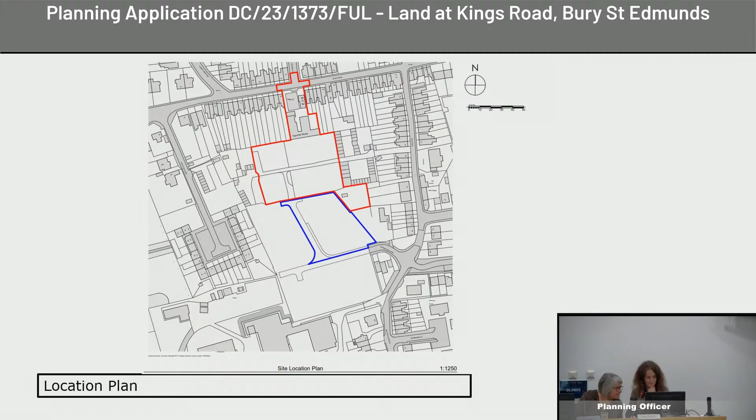The site is part of a wider allocated site in the Bury Vision BV10B in the current local plan. However, it should be noted that the site is no longer allocated in the emerging local plan and is expected to come forward as a Windfall site.

The southern part of the allocated site is now a designated local wildlife site. Further to the south, we've also got former chalk mines, which I will expand on in a little bit.

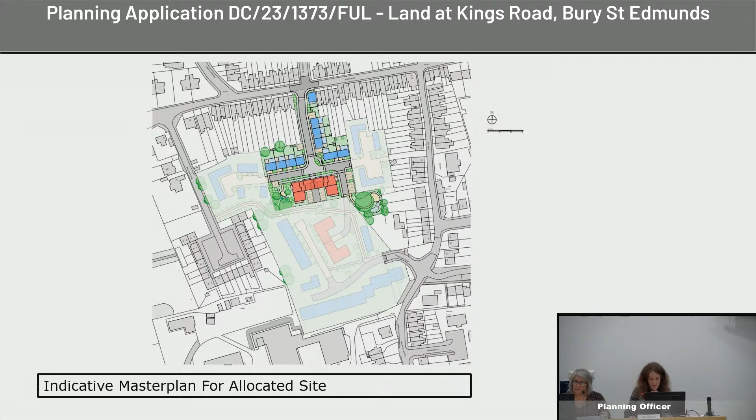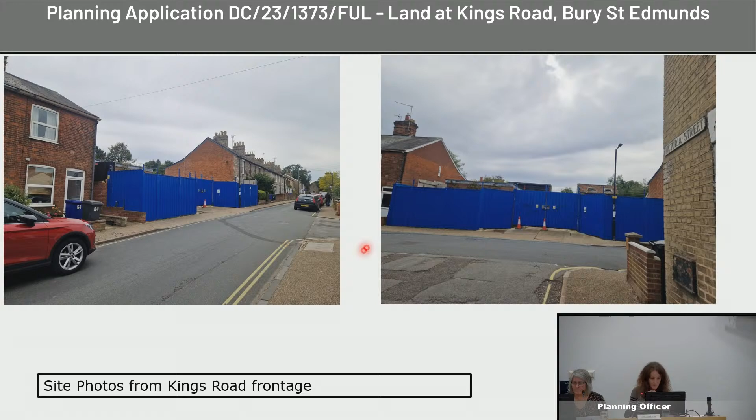And here we've got a view from the other direction, showing how the scale of the terraces slowly increases towards the east, and a view of the application site with the derelict buildings proposed to be demolished. This part is part of the conservation area; the undeveloped bit to the rear is outside of it.

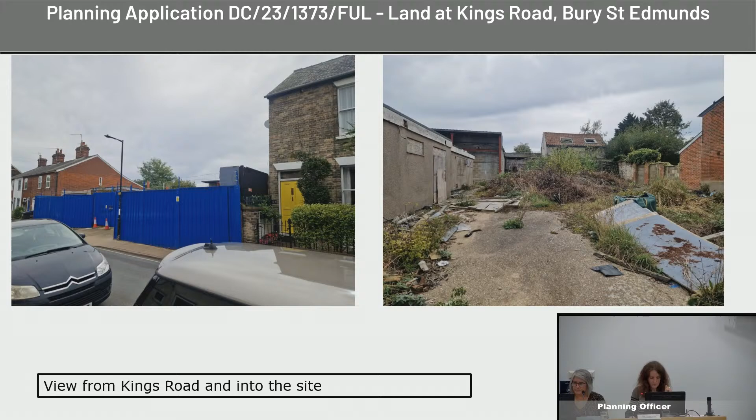To the front of the site and along King's Road, we've got either single yellow or double yellow lines, with residents parking further west and on Victoria Street.

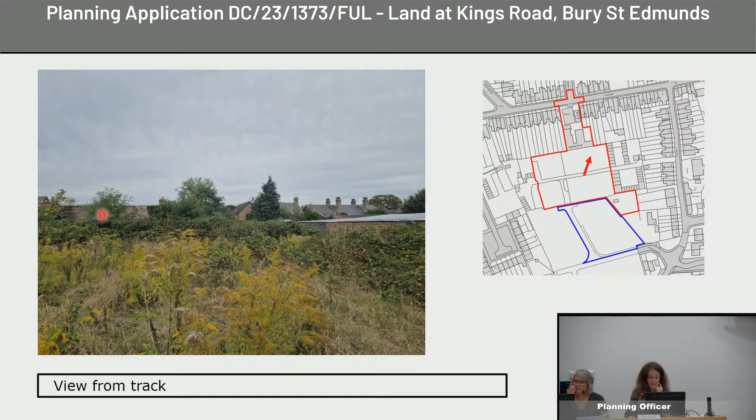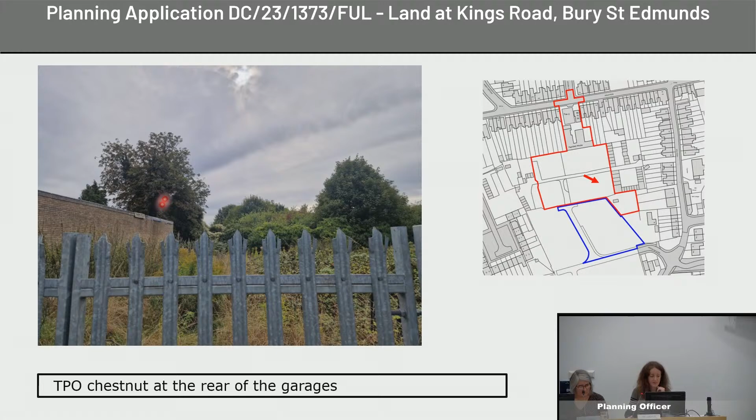Here we've got a view from the access track, which dissects the application site, looking back towards the terraces on King's Road, with the buildings on the application site to the side. That's a view in the other direction with the garage buildings along the side and the most significant TPO tree, the horse chestnut.

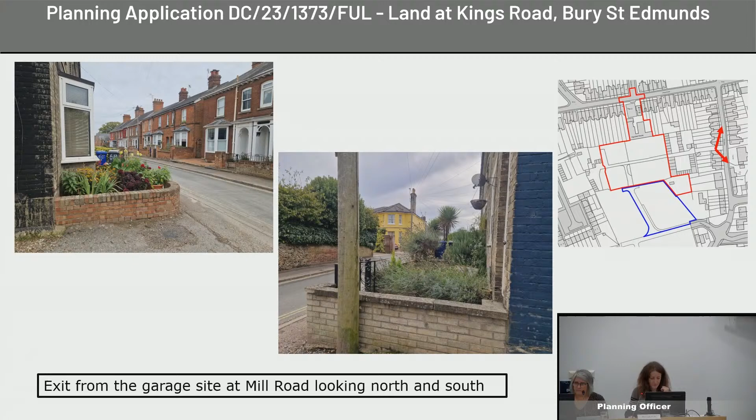I've also included some pictures from the access on Mill Road, which is off the application site. However, the right-of-way gains access from Mill Road and then crosses the application site. This is the access looking back towards Mill Road, and this is the eastern garage side. This is the view up and down from the Mill Road access to show the sort of visibility you would have entering or leaving the site.

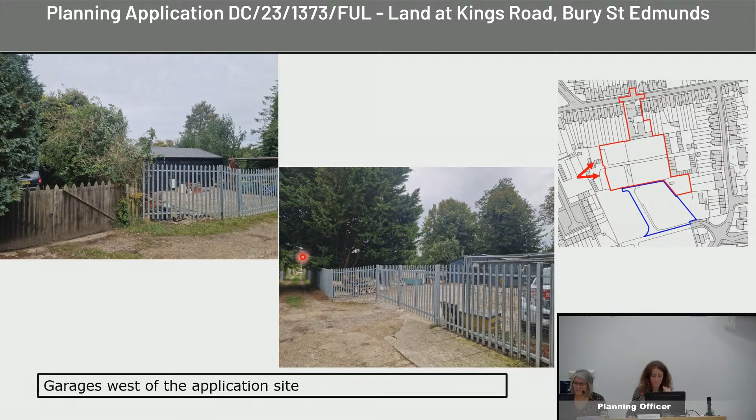And these are the garages on the western side looking back towards the application site. The entire track is fenced off with palisade fencing left and right to restrict access onto the adjacent land.

The application proposes 10 dwelling houses - 9 3-bed and 1 4-bed - and 16 apartments, of which 6 would be 1-bed and 10 would be 2-bed.

There are 2 areas of informal public open space, and initially there was a small pocket park proposed on the western public open space. However, this would not meet current standards and was therefore requested by the Parks team to be omitted in lieu of a financial contribution to play equipment off-site.

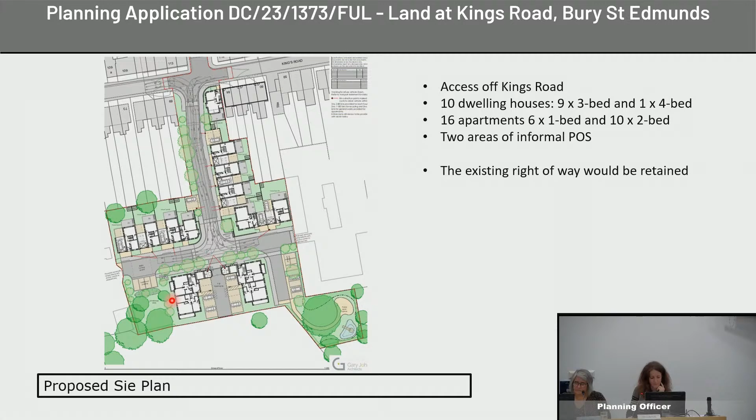The application proposes a detached dwelling at the front of the access of the new access road, which is similar in scale to the adjacent terraces and curves into the site.

There would be a reasonable rear garden that respects the size of the rear gardens of the adjacent terrace properties, with new proposed terrace buildings along the access road.

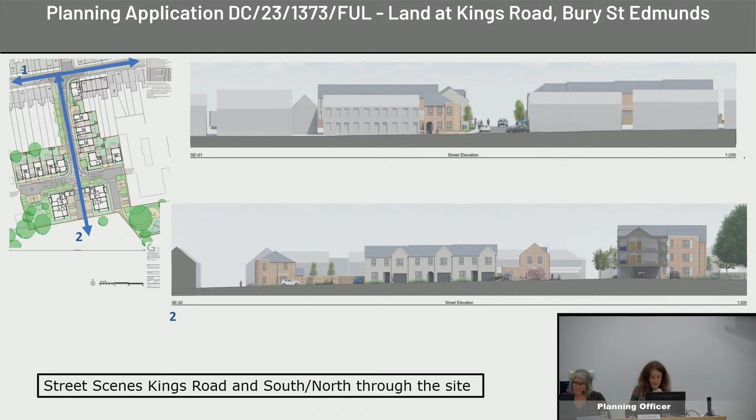By the T-junction, the dwellings would curve either side, and again you would have a second row of terraces, and opposite, furthest set into the site, you would have an apartment building which is 3 stories. All dwellings proposed at the front of King's Road and along the new access road are 2-story.

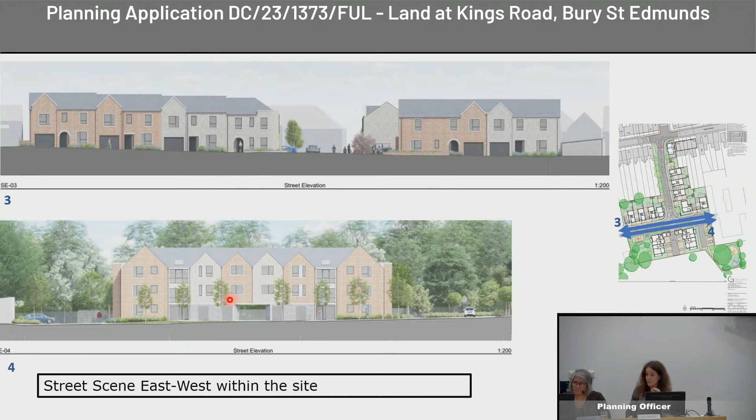And here we've got a final street view from the rear of the proposed apartment building with balconies for each of the flats, looking out onto the southern part of the application site.

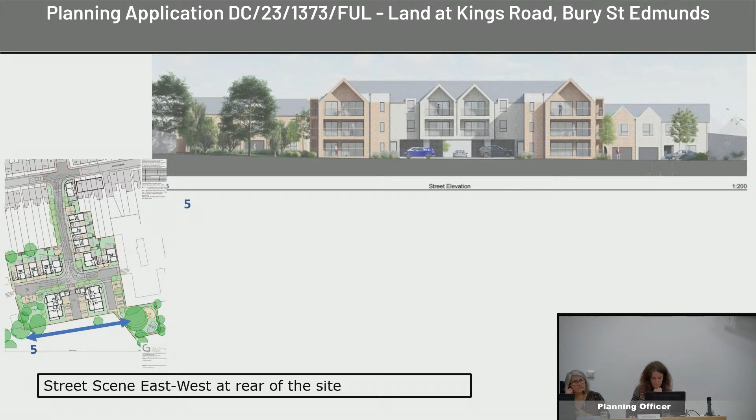All apartments, here we've got the floor plans, the western block. The eastern block would be mirrored and identical. At the top of the access road, we would have an undercroft that takes you through the apartment block to access the parking in a courtyard arrangement. Each flat meets the national space standards and would benefit from balconies.

Cycle storage and bin storage will be at the front of the building for easy access by the bin collection crew, as well as people using the cycle storage facilities.

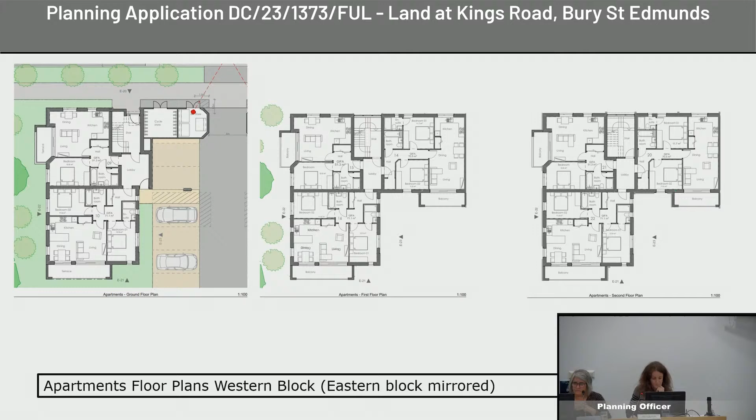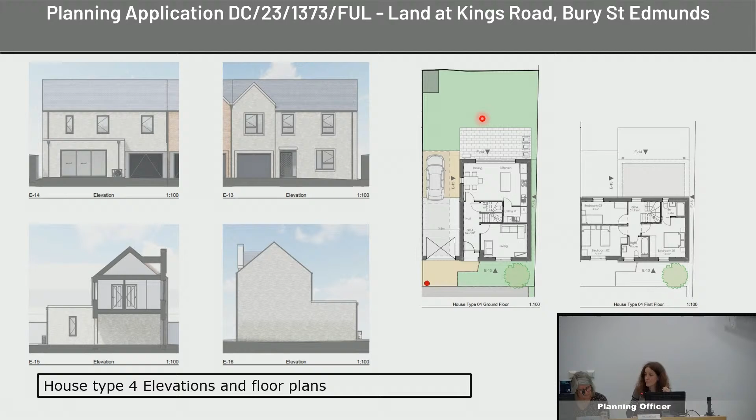And finally, house type 4. Like I've said, they all meet the national space standards and provide access to the rear gardens for cycle storage, which meets the current standards.

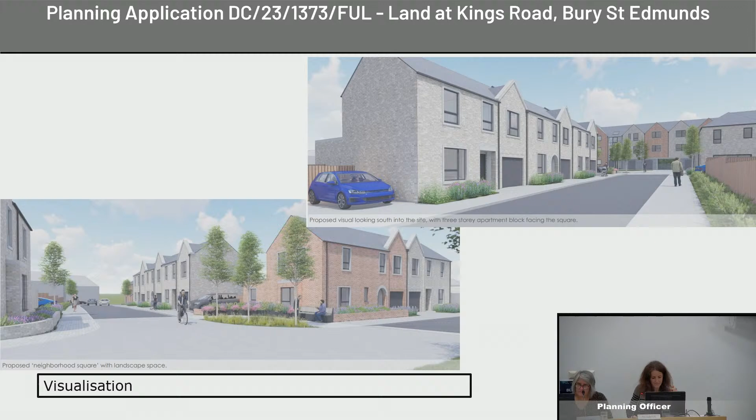Within the application site, we would have a neighbourhood square at the T-junction, and, like I've said, 2 informal public open spaces to either side of the apartment block.

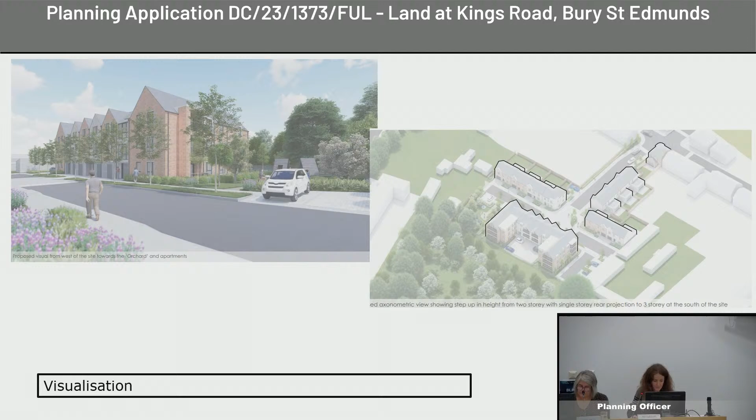Moving on to access, parking, and highways matters. The access road is proposed to be a private access off King's Road with a single footpath on the right-hand side. The carriageway would be 5 metres wide and the footpath 2 metres.

The application proposes off-site highways improvement, including a speed table at the front of the site, tying into the junction with Victoria Street to slow down any traffic in that area.

Every dwelling house would be provided with 2 parking spaces, and the apartments would each be provided with 1 parking space, with 7 additional visitor parking spaces. That is slightly below the Suffolk parking guidance, which would require 2 parking spaces per 2-bed and 3-bed unit and 3 parking spaces per 4-bed unit.

However, due to the sustainable location, the good access to public transport services and facilities in the town centre, and good cycle provision, the Highways Authority have accepted the reduced parking in this location.

Lighting details are still to be determined at the discharge of conditions stage, and would be covered by the lighting condition included in the recommendations.

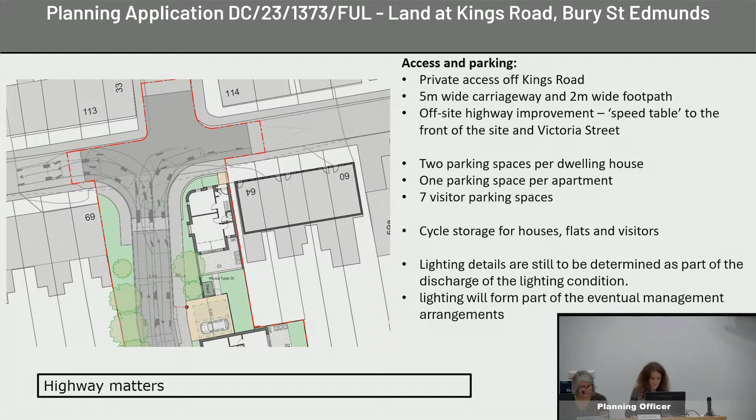The parking bays for the houses meet current standards. They are 3.5 metres wide with a 0.9 metre clearance for convenient bicycle and bin access.

Bin and bike storage for the apartments, like I said, would be to the front, and details for the bike storage within the storage room would be secured by condition as set out in the late paper. The private right of access across the site would be retained.

It is proposed that bollards are installed on the western and eastern part of the site to restrict access to the sites to those with the right of access.

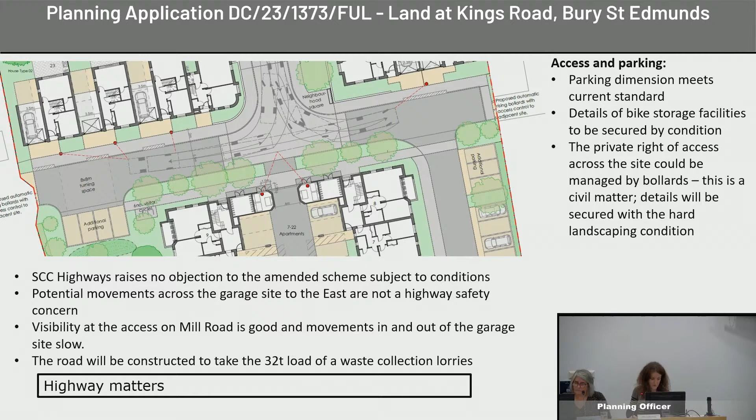However, this is a civil matter, and the Highway Authority did not consider anyone potentially passing the garage site on foot would result in a highway safety issue, and therefore highways would not want to control the use of bollards in this location.

Moving on to drainage, surface water and foul drainage. Soakaways and discharge to water courses are not feasible on this site. Therefore, in the drainage hierarchy, the only option is to connect to the public sewer system. Anglian Water have been consulted and have accepted the connection to the sewer system.

The drainage strategy has been designed to accommodate flows and volumes for the 100-year flood event with no overspill to surrounding areas and allowance for climate change. To allow for all storm cases, stormwater storage is provided in the access road here, highlighted in blue, and that would help to reduce the flows to 2 litres per second.

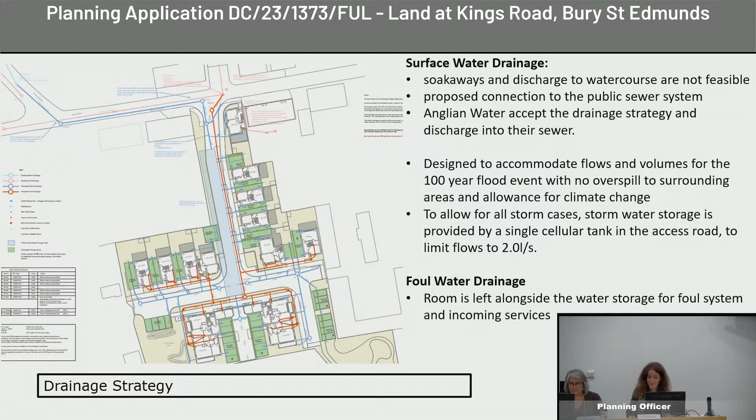The drainage strategy, like I said, was accepted by Anglian Water and the local flood authority, Suffolk County Council. In terms of foul water drainage, there is room left on the western side of the access road to connect to the existing foul drainage connections on King's Road. And Anglian Water have confirmed that the local foul sewage system has got capacity to serve that development.

Now, moving on to the matter of land stability. To the south of the application site and within the wider allocated site, we've got former chalk mines. The chalk workings caused a collapse of dwellings on the ground in the 1960s, and after that the whole area was fenced off. Jacqueline Close development had to be demolished, and ever since the applicant's consultant for land stability has been involved in the investigation of the below ground land stability matters on this site.

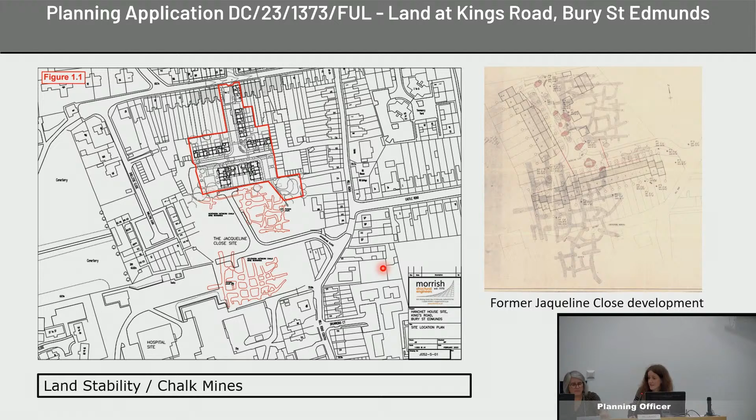For this application, a structural development brief has been prepared by that consultant in support of this application, and the land stability information was then assessed by an independent specialist consultancy, EPS, on behalf of West Suffolk Council. EPS have raised no objection to the mitigation strategy subject to conditions.

There's predominantly chalk across the application site, and therefore normal continuous concrete trench foundations will be adopted for the construction. In the southwest corner of the application site, where we've got a group of TPO trees, there is a very local intrusion from the Jacqueline Close workings, and then there's another very local intrusion at the second public open space underneath the chestnut TPO tree. To deal with these, it is intended to fill both these small localized areas of workings from ground level in a controlled staged process.

The existing workings will first be plugged at the boundary location using a dry mix to form a barrier, which will be administered from the Hanchets site from present ground level and by using open drilling to avoid any potential damage to the existing trees.

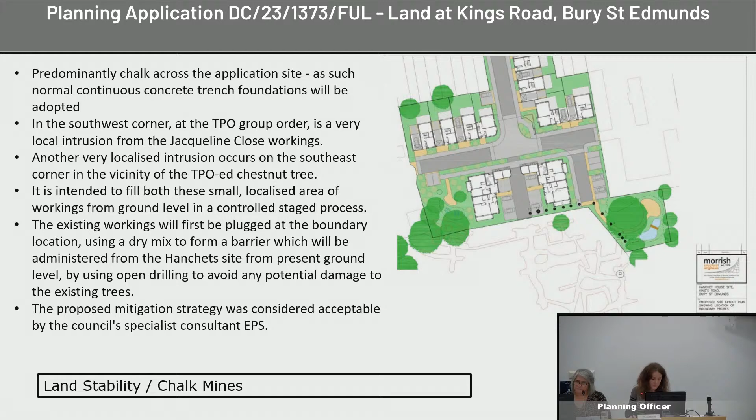In response to the original application, we have received representations from 10 properties and objections from 7 neighbours, raising concerns mostly about highways matters and parking provision as set out in the committee report. The ward councillors echoed those concerns and asked that the application be considered at committee.

The Bury Town Council submitted a holding objection to the original submission and suggested further investigation of the chalk mines, raised highways concerns and concerns about waste collection and energy and water efficiency.

Subsequently, amended plans and further information, including a highways technical note and additional ecology information, have been submitted, and a full reconsultation was undertaken. In response to the reconsultation, we have received 1 representation and 2 objections.

The Bury Town Council has maintained their objection on highways grounds and raised additional comments about sewage and refuse collection and the unambitious design.

In terms of consultation responses, we have no objections from any of the consultees, subject to the conditions attached to the recommendation in the officer report.

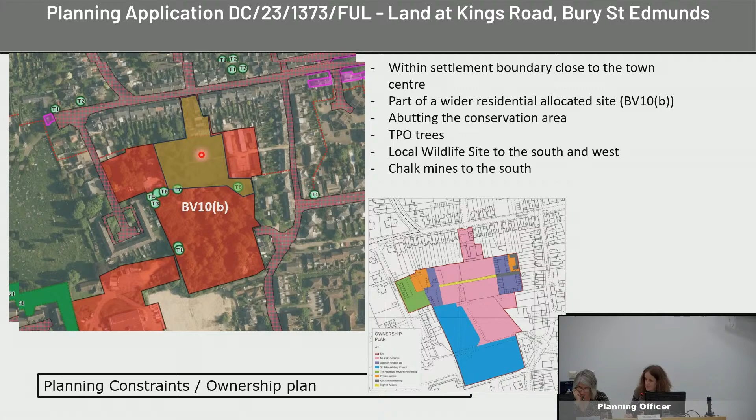You raised the question about the funding of the maintenance and what happens if something fails. I think that is like with every development. It is something buyers are aware of, and everyone would, like you do when you buy a property, have a solicitor check these things. It is very common in locations like this to have small developments that are not adopted and have private management companies. We will secure a management plan for the soft landscaping and public open space, and any maintenance will have to be undertaken in accordance with that schedule. So it does not really matter which management company does it. The planning control is to enforce the maintenance in accordance with the maintenance plan.

Yes, please. So, Chair, just a couple more questions. I think Councillor Waldron asked about the stability of the land and what happens if in 20, 30 years' time buildings collapse.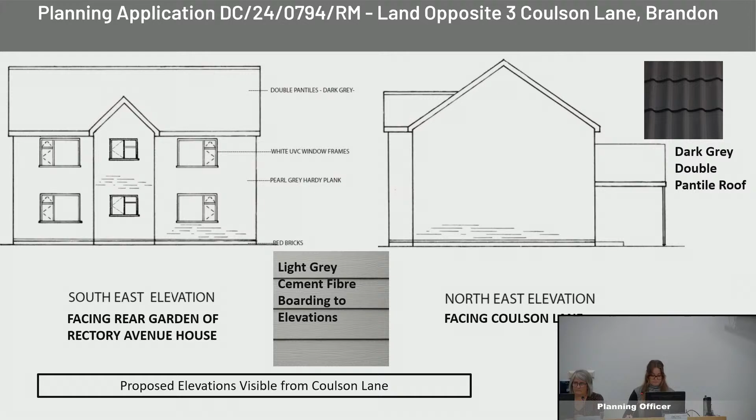Moving on now, this is the front elevation, you can see the carport underneath and the balcony above. This would be seen from the public right-of-way and the orchard to the north and the wide open countryside. And here's the southwest elevation, which faces the bingo hall site, which I'll come on to in a moment. Just for clarity, these material snippets show the actual colours, they're not black and white.

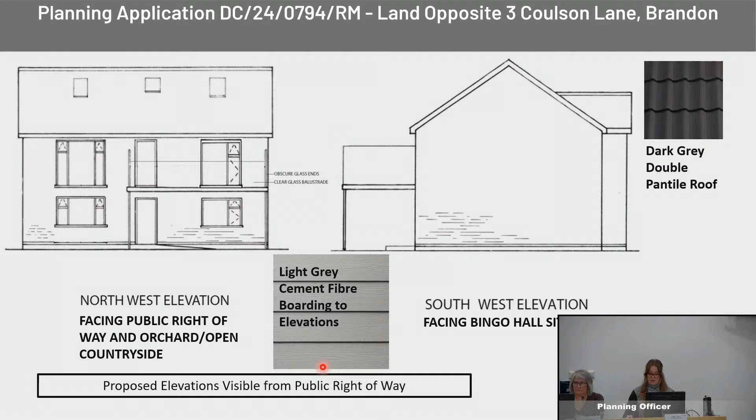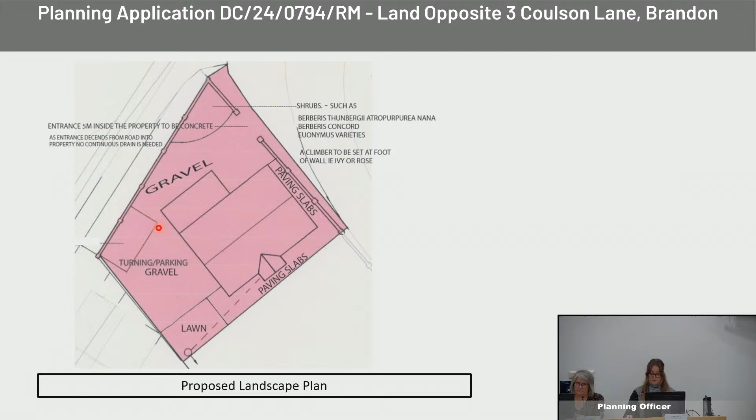We've got the proposed landscape and layout plan here, with a small element of soft landscaping proposed in this corner. This would be the driveway, which would be gravel, and the parking area. We've got a small piece of lawn and then paving to the rear of the dwelling. Just to highlight, there is an existing garage, which you'll see in the photographs in a moment, that is to be demolished.

For context, an application was granted planning permission last year for 8 dwellings on the old bingo hall site. The development has not started yet, but the bingo hall has been demolished. This shows the layout of the approved site for the 8 dwellings, and then we've got the application site just here.

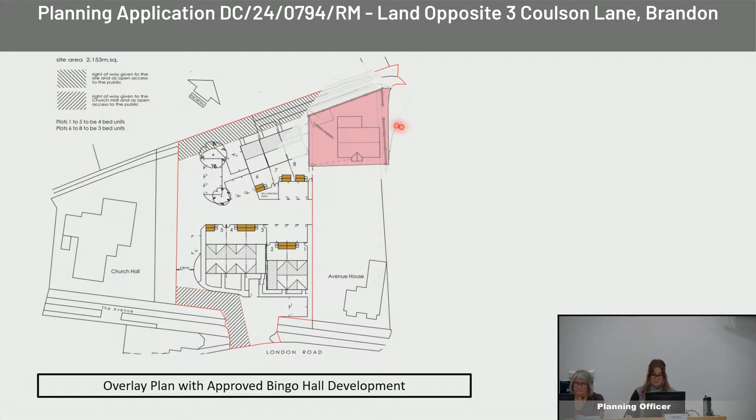I'm going to show you some photographs of the site, and then I've got a couple of videos as we didn't go out on site on Monday.

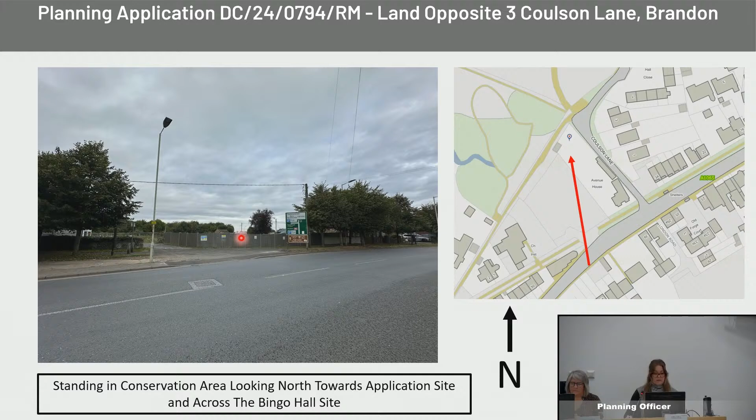And then I'm looking to the bingo hall site with the application site beyond. You can just see the garage, which is to be demolished. And that's just a closer view of the site from the bingo hall entrance.

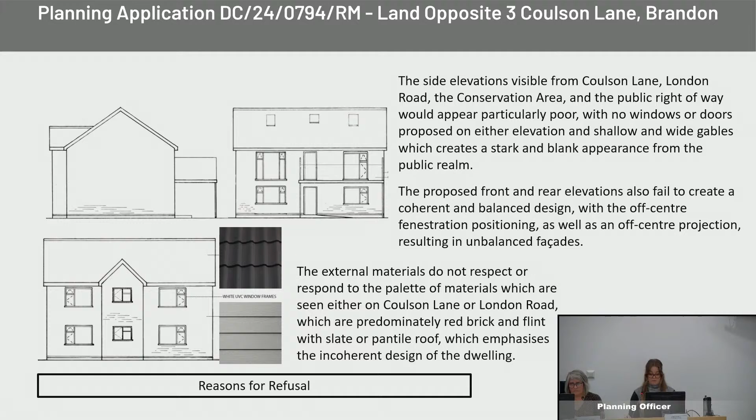This emphasises the incoherent design of the dwelling. As well as the design, the layout of the site is also considered to poorly relate to the surrounding area. The dwelling has a large footprint that fills most of the plot, resulting in a cramped and contrived design, dominated by a gravel parking area.

I've highlighted in this purple-blue colour the parking area, the gravelled area for turning and parking. That doesn't include the carport, which is underneath here.

The positioning of the dwelling results in a limited amenity space. They've got this small piece of lawn and then the paving area here, which at points, particularly along this side and where this projection is, measures just 1 metre from the boundary, extending to 2 metres in places.

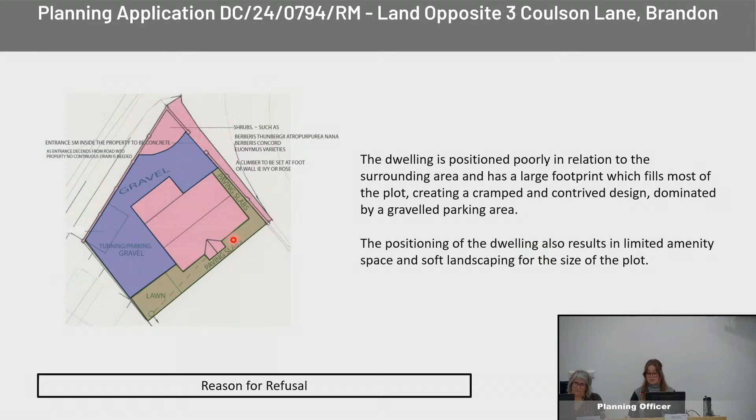In summary, the proposal does not represent good quality design and fails to promote or reinforce local distinctiveness, as required by policy. The combination of the incoherent and cramped site layout, the unbalanced appearance due to poorly proportioned and positioned windows and the projection, as well as the use of inappropriate materials, would lead to an adverse impact.

This would adversely impact the character of the area, the public right-of-way, and the conservation area. It's officers' view that the proposal conflicts with policies DM2, 17, 22 and 44 of the Joint Development Management Policies document, as well as CS5 of the Forest Heath Core Strategy and paragraphs of the NPPF regarding conservation area impact and overall design.

So officers are recommending refusal for this application. Thank you very much indeed, Amy.

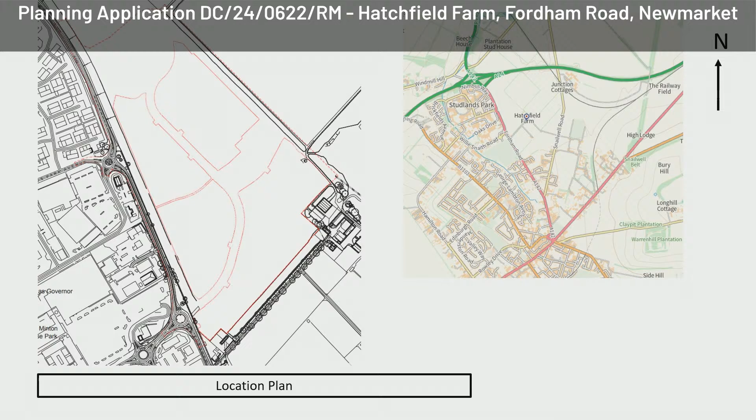The site is located on the northeast edge of Newmarket. If you look at the location plan on the right, you can see the site in this location here.

The laser pointer hasn't appeared just yet, but it's on its way. I have to go around coming in. That's really weird, it was over. Chair, we're having trouble finding the laser, it's not where we think it should be. I've got it, got it. All right, ta-da! Good job there aren't any cats in the room, they'll be chasing that around the screen.

Right, thank you. So here is the site here. We have Fordham Road shown in red, which runs north to south along the boundary of the site, and although the site finishes just before it, we do have the green line of the A14, which runs further to the north.

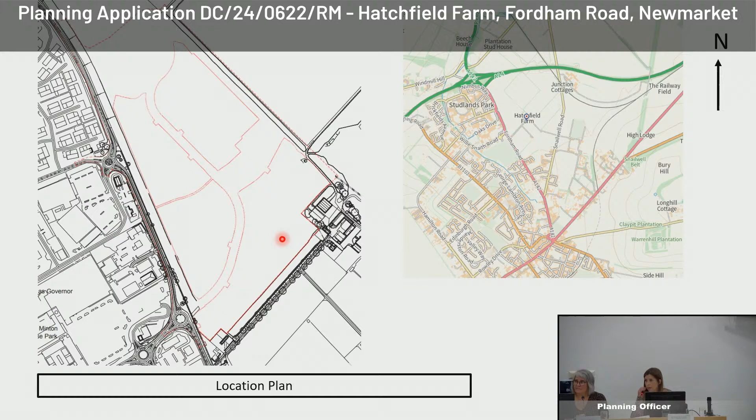The plan on the left shows the residential parcels within these red lines, and that's what's going to be considered today. You can see this is broken down into 4 separate parcels, and it excludes the open space, the spine road, and other infrastructure which has already been approved. This will become clearer on the next few slides.

I'm sure many of you are aware of the background to this site, but just as a brief reminder, the site was granted outline planning permission for up to 400 houses by the Secretary of State in March 2020. This application included the means of access to the site, shown in 2 places - this access at the northern end and this access to the south.

The site was allocated within the Forest Heath Site Allocations Plan 2019, and a master plan was adopted in the same year as informal planning guidance.

Subsequent planning applications have also approved the details of these 2 accesses, as shown there, as well as the spine road that runs through the middle of the site, the drainage basins, which you can see at the northern end, and an area of public space which surrounds the basins but is also here as more usable public open space, including a children's play area and a multi-use games area.

We've also had an application last year which came to committee, which officers presented, and a site visit was carried out for these 3 additional parcels which provided additional public open space. A design code has also been recently approved for the site, which was one of the conditions on the outline.

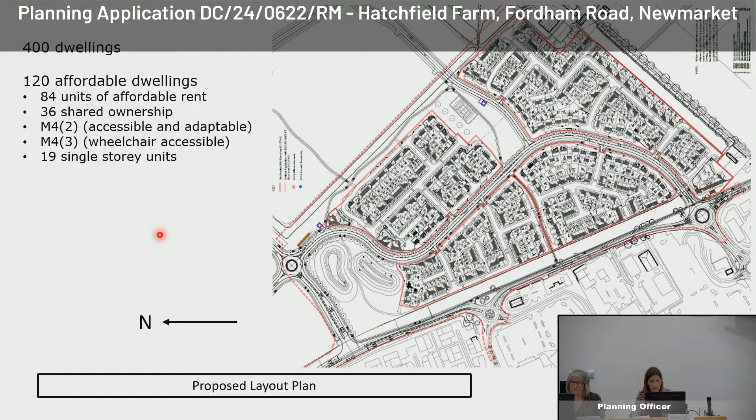So this is parcel A. You can see from that wider plan, this is the area when you first enter the site from the roundabout next to Tesco's and McDonald's. This is your main entry point, and this is parcel A here. Fordham Road runs along the bottom, and you can see this white section is a wide mixed tree belt that provides good screening of the site. We have a foot and cycle path, already approved, which runs inside this landscape buffer along this boundary, and these dwellings have been designed to be outward facing to provide surveillance of that route.

The development has been designed to have some lower density housing which fronts onto the spine road, and then a denser development containing more of a range of housing as you get further into the site.

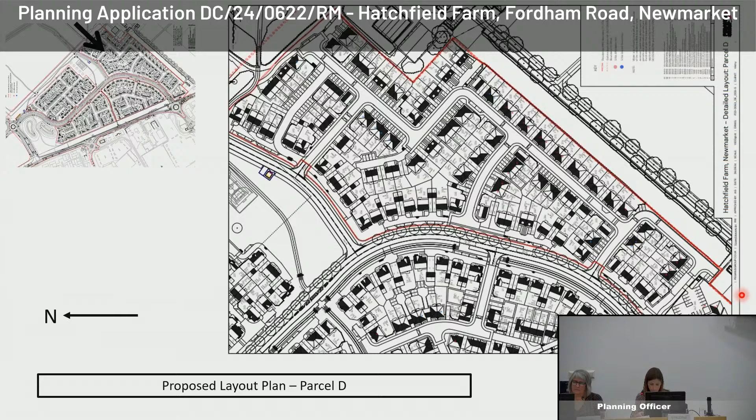So just as some updates, before the agenda was published, we were still awaiting confirmation from Active Travel England and the Highway Authority. They have both confirmed that they are fully satisfied with the application. The Highway Authority have suggested some conditions, and I have circulated an amended conditions list, which I will go through at the end of this presentation.

Active Travel England, we've had quite a lot of discussion with them. Many of the concerns they'd raised were easily amendable, and they have added a couple of additional conditions which are also on that list.

The master plan and the design code included the use of 4 different character areas, shown as the coloured blocks here. The developer has done an analysis of areas of Newmarket and taken the characteristics and features of these areas and used those to inform these character areas. This is a standard approach used on large residential sites, and it helps to aid legibility and ensure distinctiveness when you have large numbers of houses.

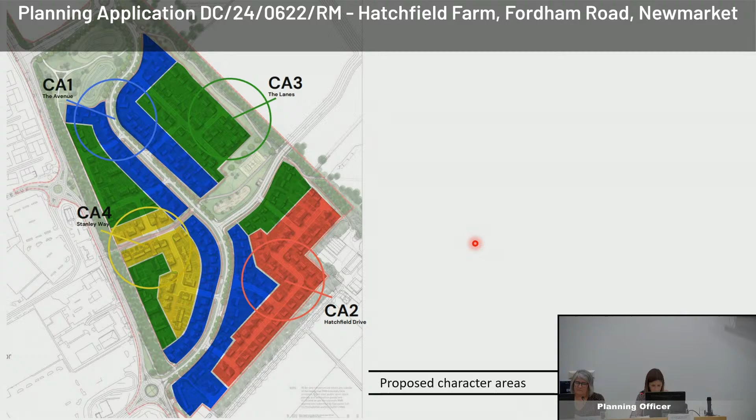So this is called the Avenue character area, shown in blue on that plan here. So it's development that fronts onto the Spine Road, medium to low density. The houses are generally detached, with private drives, accessed off a private drive rather than having individual access onto that Spine Road. We can see from the images here, they're largely red brick, with some use of render, and they are proposing slate roofs.

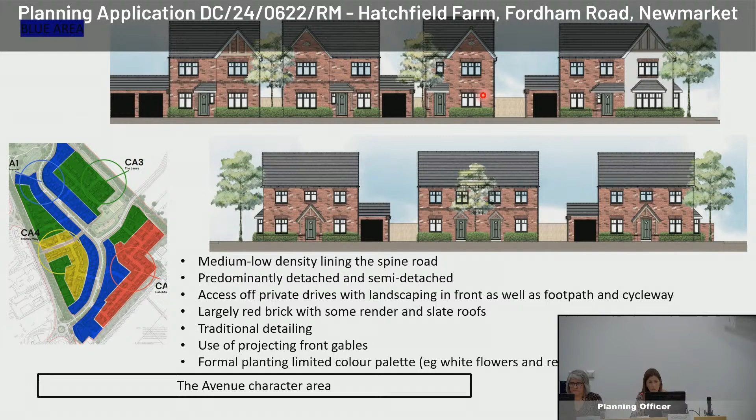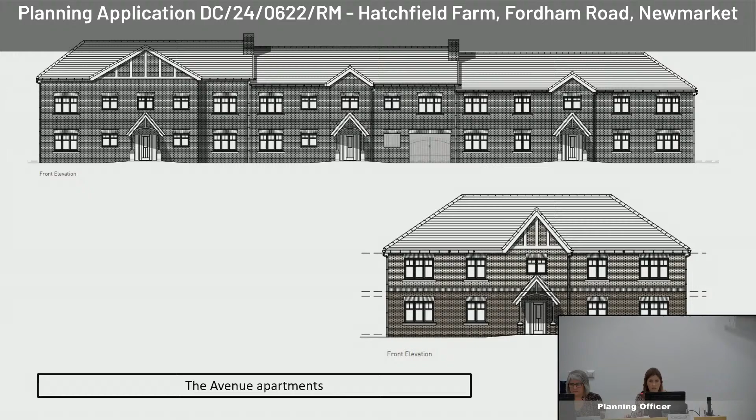That is the character area for that first Spine Road. It also includes the apartment buildings, because they're also within that character area, and you can see a couple of examples there. The top version is the building that we have on the entrance to the site, and then we have an example of another of the apartment buildings, which is on the northern entranceway.

So we move on to the next character area, which is the Hatchfield Drive character area, shown in red on that plan. This was the lower density dwellings on the southeastern boundary. They have a more formal building line, a lot more uniform in pattern, largely semi-detached, albeit we do have some examples of detached dwellings. They mainly feature hipped roofs, and they have particular landscaping characteristics, again, to help define those areas.

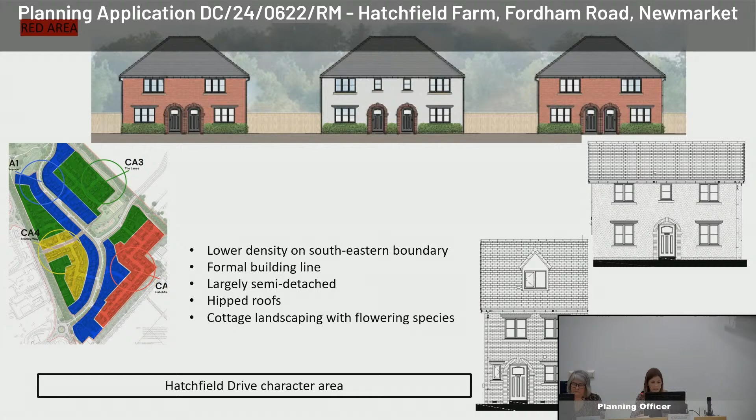This is named the Stanley Way character area, shown in yellow. So it's more of that core of the development - higher density, a greater housing mix, more attached and terraced dwellings, a bit more variation in roof form. We have some single-storey dwellings here, as well as 2-storey dwellings, and it's just generally more contemporary in character. It includes that link to Fordham Road, which I mentioned earlier, and that's just a photograph to show that in place.

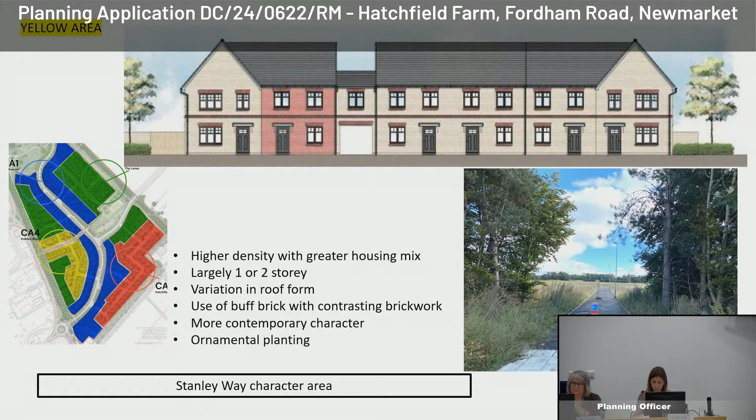Our last character area is shown in green. This is called the Lanes character area. Again, it's higher density. We have a variety of parking solutions, so not necessarily all private driveways - frontage parking, parking courts. We have some use of shared surface roads, and more semi-formal planting.

The dwellings will all incorporate solar panels, and in most cases they will include air source heat pumps. You will note there are a couple of conditions which ask for the details of those, and they are on your papers.

Officers consider the character areas to be well informed and to provide distinctive areas of development, which also reflect the character of Newmarket. The dwellings themselves are well designed and articulated and are considered to provide a high quality environment.